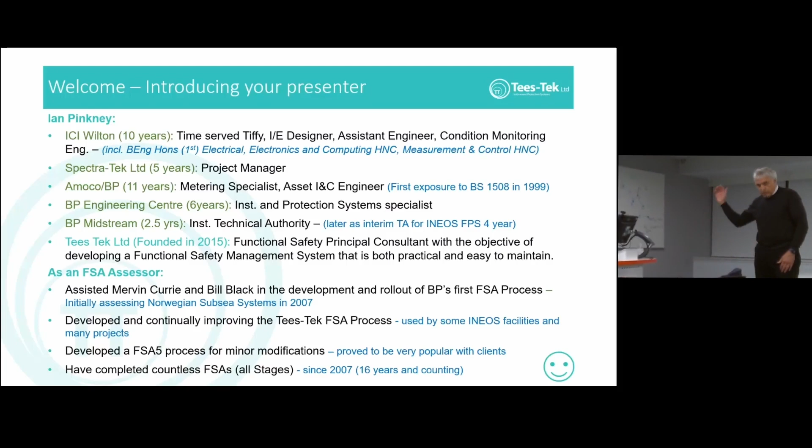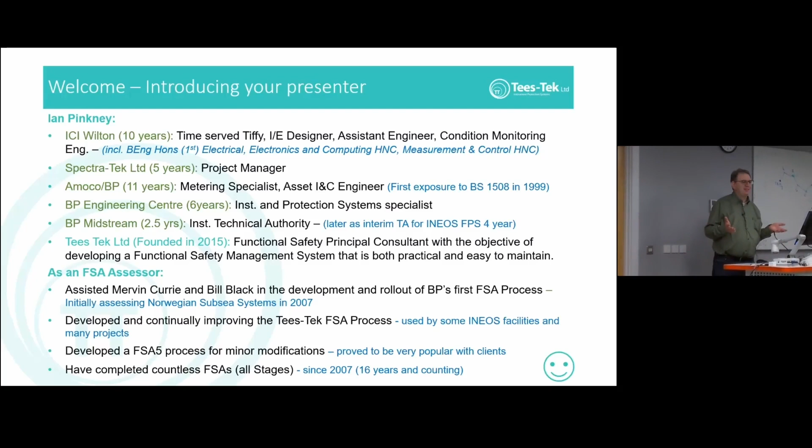So today we're going to talk about reliability. Before I start, well, this is me on the screen at the moment. I just want to say that unfortunately it's one of those subjects that didn't have a lot of good graphs and pictures to put on. When I rehearsed it today, it did take a while, so I'll be going at a bit of a pace, so if you can bear with that, that'd be great. But I'm hoping you'll find the topics interesting, particularly if you're doing functional safety and doing the reliability calculations, that sort of thing.

I'll very briefly say that I started my working career on Teesside, ICI Wilton, like a lot of people, and then since then I went 25 years working everywhere else, and only in the past 10 years did I return to Teesside, where I work from. But most of my clients, because of my past, tend to be outside the area, so you probably won't know me from working in Teesside.

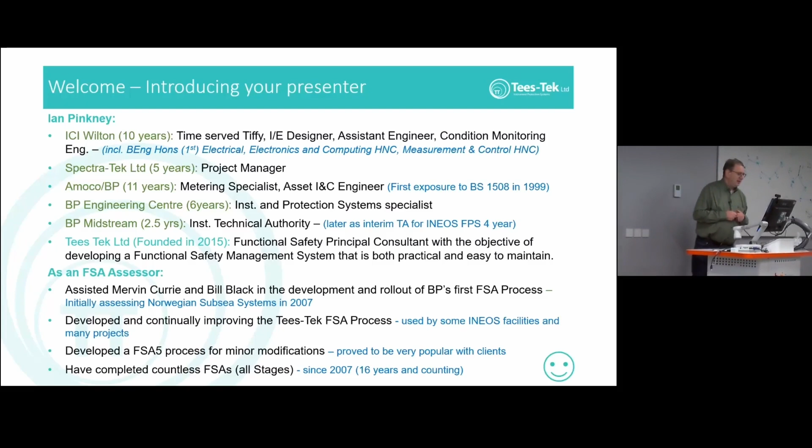So last time we looked at the SRS. This time we're just looking at the SIF reliability study. I'm hoping to do more of these if you're interested, and we'll look at other activities in the safety life cycle, and look in some detail at the typical things that are misunderstood, or mistakes people make, or terminology that's misunderstood, and so on. So this presentation is based on my experience as a technical authority and functional safety assessor.

We're going to be looking at the reliability. We're going to be talking about 61511 - that is always my guide, and there's things in here. Now, there's a lot of words in this presentation, but hopefully that will make a good handout as well. So if you've downloaded it from the InstMC site, all the information's there.

Before I start, I want to remind you that BS EN 61511, or IEC 61511, has been developed by humans, and it's an international team that was involved in the first development of it. That means they came from varied outlooks, individual biases and personalities that you always have, varied competencies were in the team. There were national, company and individual objectives. There were varied opinions, and safety tolerances and compromises were made. And there were different vocabularies and terminology from different parts of the world. So the document itself does have, and if you know where you're reading it, you can see them, these compromises, inconsistencies and discrepancies.

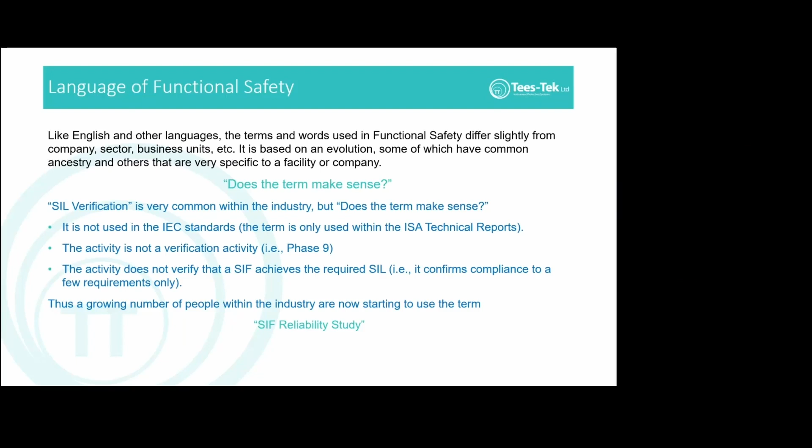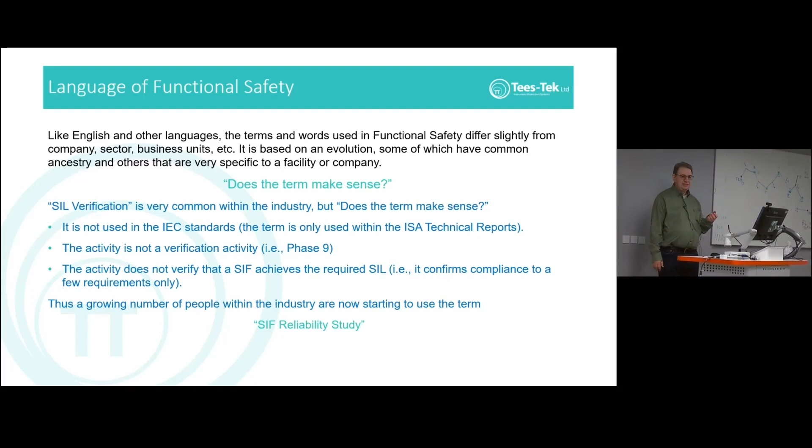But I would always say to you, does the terminology make sense? I'll take one example: this subject is often called SIL verification. It's used throughout the industry, that term - I use it because I know people understand if I say it, but it's not ever referenced as that in any of the IEC or ISA standards. I'll be clear on the standard.

In the definitions, it's an activity that's not a verification activity. It's not a phase 9 activity, it's a phase 4, it's to do with design. And the activity is not to verify the SIF achieves the SIL. In fact, all it does is look at compliance of a small few items, all related to the SRS.

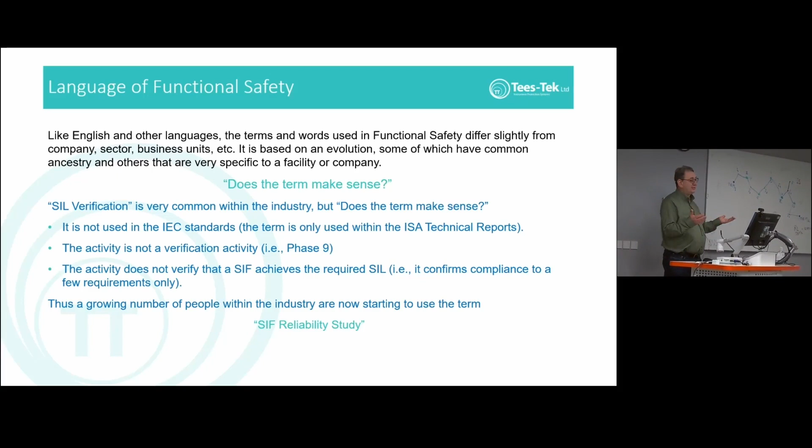So there's a growing number of people within the industry that are now starting to use the term SIF reliability study, and I think that's a far better description. But again, it's not in the standard, so you can use whatever makes sense to you.

Now, the standard clause on failure rate, and we're going to talk about failure rate here, is that the reliability data used when quantifying the effect of random failures shall be credible, traceable, documented, justified, and shall be based on field feedback from similar devices used in a similar operating environment.

Now, I've highlighted what to me are the key words. Credible, traceable, documented, and justified are not just keywords for this activity, they're keywords you should use throughout functional safety. Whenever you're doing work, whenever you're asked a question, whenever somebody puts something in front of you and says, is this okay? Ask yourself: is it credible, is it traceable, is it documented, and is it justified? Because that's what people who do functional safety assessments will be doing if they're doing it right. And certainly the regulator will be doing that.

The field feedback one, well, we'll cover that in a slide or two.

Now, there's many failure rate sources available. I'm sure you've used a number yourselves. There's what we call field data, like OREDA and SINTEF, which is drawn from, particularly OREDA, which is offshore. It's taken from their databases, and they do analysis on it, and they come up with some values.

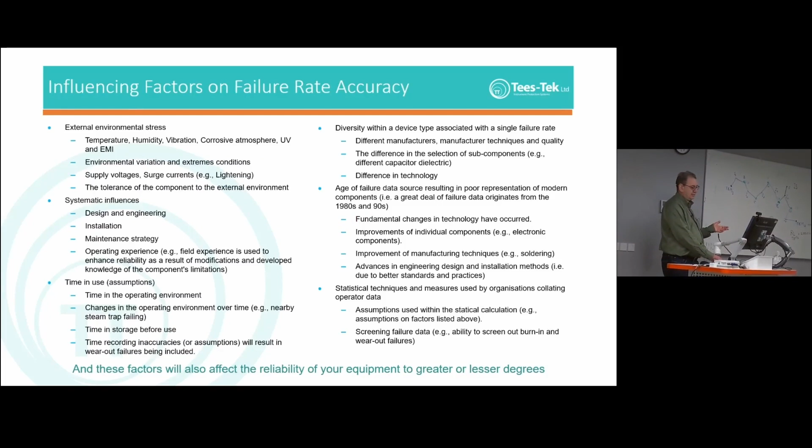So how, what would the regulator be looking for? Which one? These are just influencing factors - there's lots of influencing factors on this data. You can read that yourself.

So the regulator ideally is looking for field feedback, data taken from the facility in question, accurately diagnosed and recorded, good practices for identifying systematic failures amongst the historical data, causes of uncertainties identified, assessed and accounted for, and an upper bound of confidence of 70% for each reliability parameter.

Number of sites I've seen doing this: 0%. Nobody's doing it. It is very, very difficult. I've seen many attempts, different ways of doing it, and they've all failed. I have built up my own ideas of how this could possibly work, but it's taken me a lot of years to see all these failures, and now I think I know the solution. But how would I know? Because it would take years and years of collecting data to find out if we're on the right track. So the chances are that you're not going to have that data.

So here's another way of doing it. Always start with certified data - that gives you the traceability, particularly if it's from an independent, trusted organisation. Then compare that certified data with other sources of information. Compare it with your field data that we talked about, OREDA, with your likes of SINTEF, generic data, and FMEDA, and so on. Ideally, another certified device.

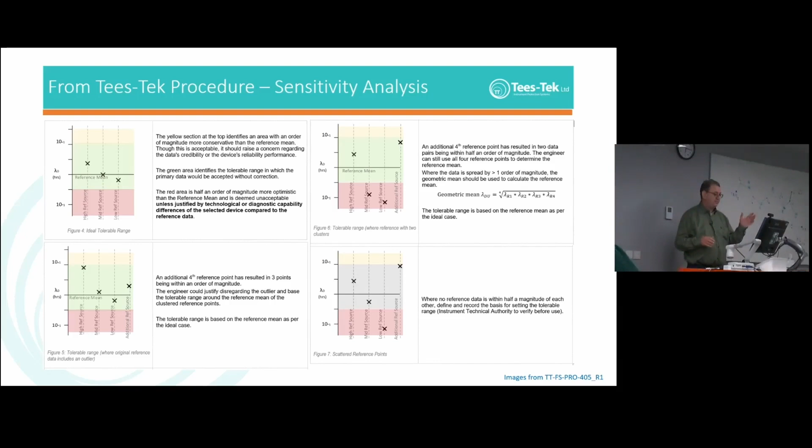This is straight out from my procedures, and it just goes to show how you can compare data graphically. The first one shows everything is within half a magnitude of order, and that's in the green area, no problem.

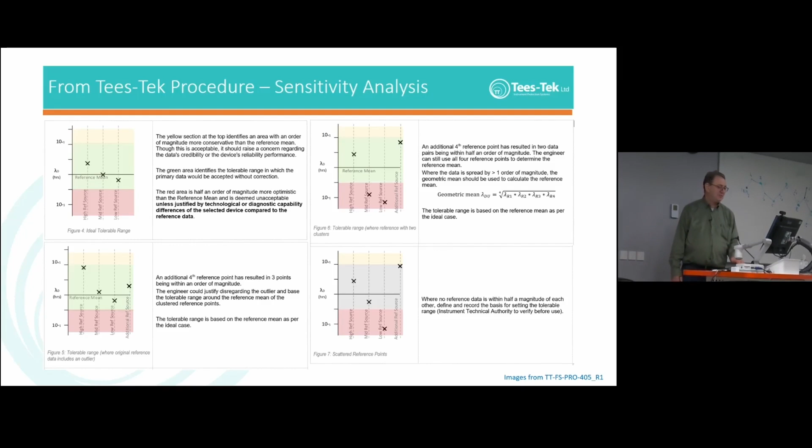The next one says, well, let's imagine that the first three come out and you've got one outlier. Get another bit of data and compare it. If they're all sort of outliers, then take the geometric mean and maybe use that as your reference point, or move that as a comparison for your certified data. If you can't do any of that, then maybe have a chat with somebody else and see how to deal with the situation - a technical authority, if you have one in your company.

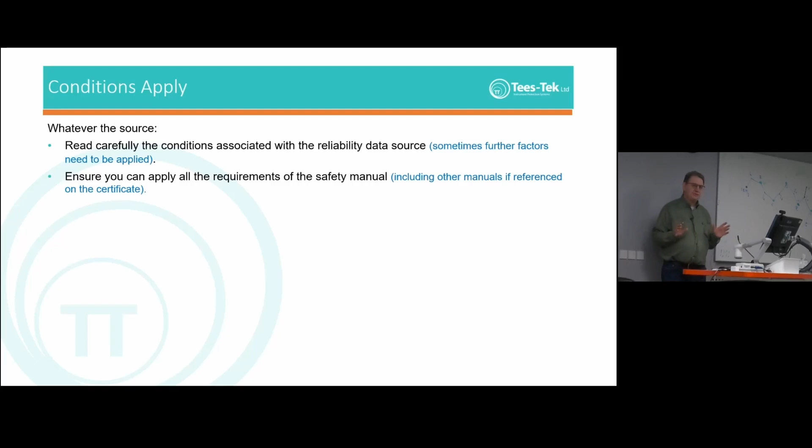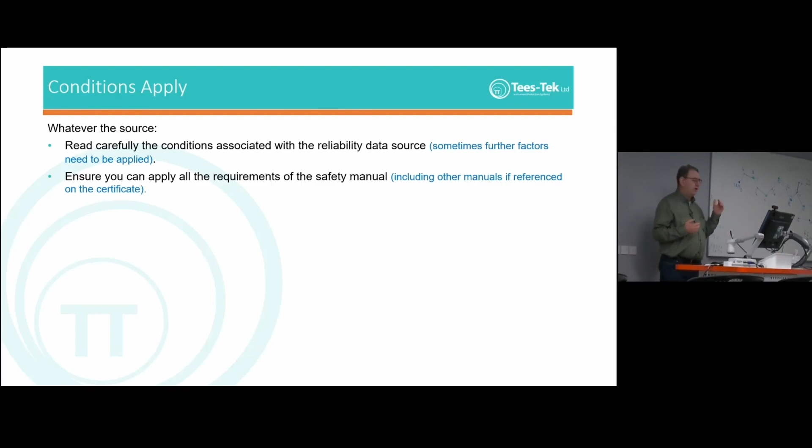So, firstly, I've got a question for you guys. Question 1: what is the difference between random and systematic failure? Is it A, systematic failures are deterministic and not random, and random failures aren't - i.e., it fails given a set of conditions? B, systematic failures can be eliminated by modification, but random failures cannot be eliminated? C, random failure rates are more or less constant after burn-in and before wear-out, while systematic failures are not constant? Or is it D, all of the above? So, anybody want to decide which one it is? D. Does everyone agree with D? Yeah, D is correct.

So, next question. BS EN 61511, section title 11.9. It's basically saying, what is the requirement for this activity that we're looking at? Is it the quantification of random and systematic failure? Is it the quantification of random failure, quantification of systematic failure, or does it just say quantification of failure? Anybody? Okay, so it's quantification of random failure.

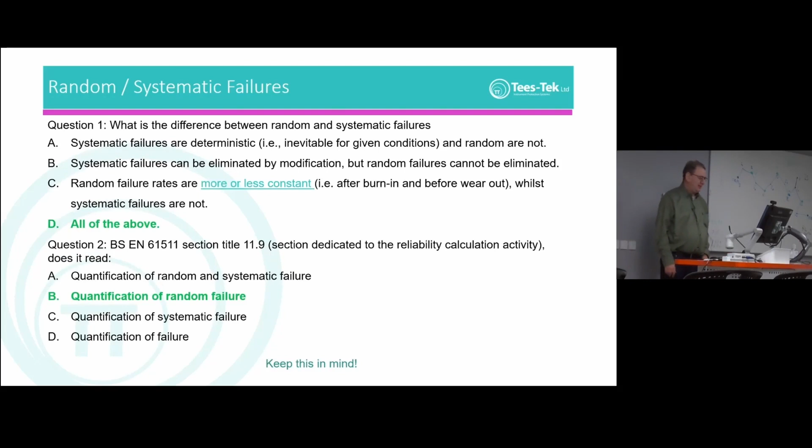This is important, and the reason it's quantification of random failure is because you can't quantify systematics - that is the basis. You cannot quantify systematics because they don't meet any of the criteria. They're not a constant failure rate, and on some sites certain types of failures will be fixed and they don't happen again because you can fix them. On other sites they will be there and they don't get fixed. So from site to site, it's not even random.

It's systematic. What would be an example of a systematic failure? Poor installation, or what? So, a systematic failure is, as you say, poor installation. It could be blocking of an impulse line with liquid. Let's say that every time you do a letdown or something like that, you block your impulse lines. That's systematic, yeah?

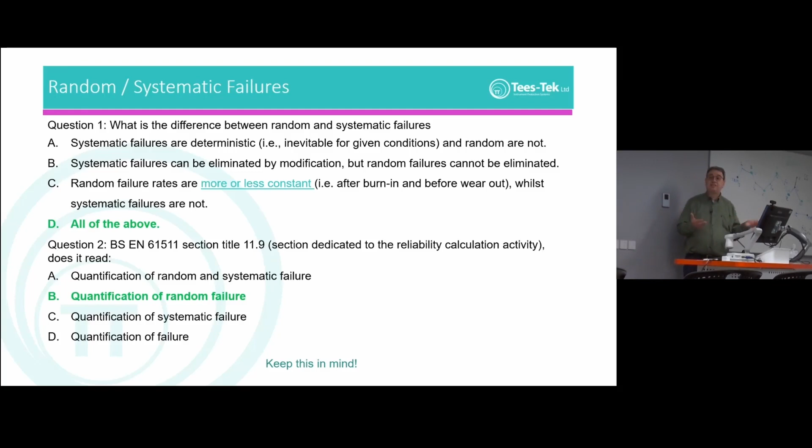Now I want to talk to you about de-rating factors, and this is linked. These days, when you get these calculation models from the likes of ExSILentia and ABB, they come with these, and they're getting more and more de-rating factors.

You get things like wet and dry factors, where you multiply the random failure rate due to the process condition or the environment. You get Site Safety Index, in ExSILentia SSI, multiplication factors of random failure due to process conditions, and management and so on, specific to that site.

Maintenance Capability Index is another value that people who use ExSILentia tend to use. Again, more multiplication factors for random failure, depending on the ability of the site maintenance team. So basically, if they're incompetent, instead of fixing the problem and getting them trained up, it's not a problem because you can just put a low MCI factor in, and multiply it against your random failure rate in your calculation. That'll solve it.

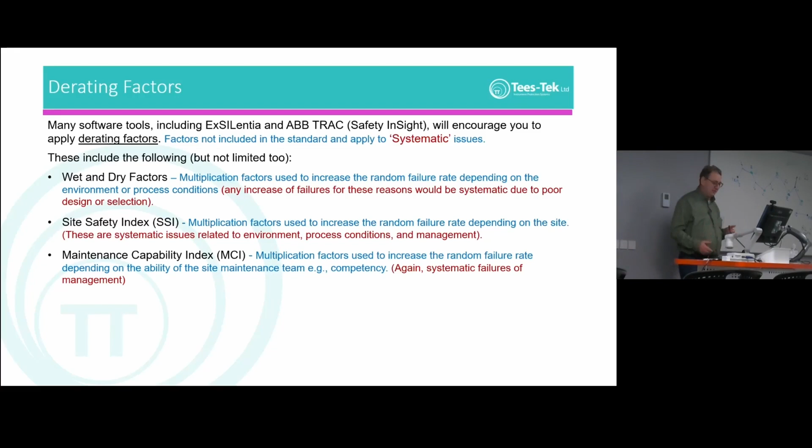But does it? Before using any of these factors - these are all systematic failures. There's a tendency to try to shove systematic failures into your calculations all the time. How can a systematic issue have any relative relationship to a random failure? It doesn't. How does increasing the random failure rate improve the accuracy of your calculation? You're out there to quantify the random failure rates, that's what the standard is saying. You've been given a value, you've gone and found it's credible, and then you're making adjustments to it.

Does it improve the safety by compensating for poor functional safety management? Well, not really. You're just trying to compensate for it, but in a stupid way, really.

Take for example, let's say you've got poor maintenance - well what will that do? You mark it down, it's going to increase the random failure rate, which is going to increase how often you're going to test it, which means that safety instrument is going to be exposed to those useless technicians more often. It is not the way to go. You need to solve it by solving your systematic issues, solving your maintenance issues, solving your management issues, and so on. You do not just put multiplication factors into the calculation.

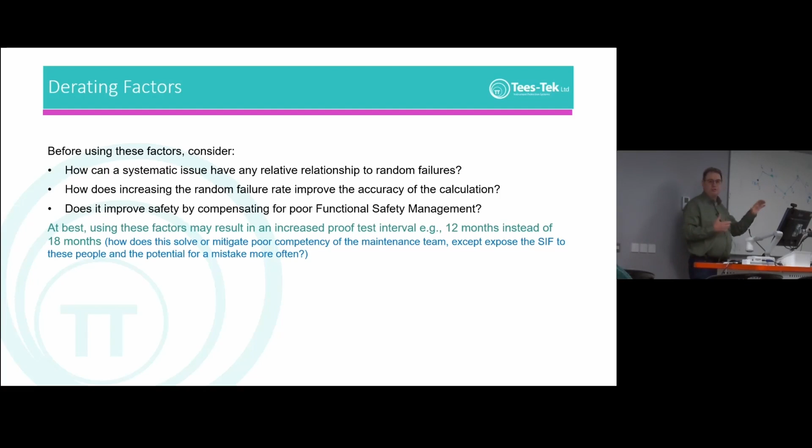A lot of that comes down to what we were talking about originally, which was you're not that confident on the failure rate you're using. So if you've done your sensitivity analysis and proven and got credibility to show to anyone that you know what your failure rate is, then you don't need to start adding in loads of other factors. Give yourself confidence in the failure rate you're using, and if you've got site data, don't increase it, solve it. Don't start multiplying them, solve the problem. Because if it's wearing out, if it's degrading because you've got a thing, replace it.

But if you only get the opportunity every 3 years, every 5 years to make these changes, is it not right to acknowledge that you're putting your instrument into a much more difficult environment, particularly if it's happening all over your site? I just don't see how it solves it. What are you actually achieving though? You're saying, am I reducing the risk to people on my site? Are you? Yeah, I do think you've got to stick with the 2 factors.

So I'll ask a different question. Do you build systematic failures into your proof testing? As in correction and finding and straightening up of systematic failures? Oh yeah, absolutely, you would.

We need to put them in because we're trying to make sure people don't miss things. That is because we include inspection, because inspection is a maintenance routine that you should be carrying out, which tends to look for systematic failures. And we tend to include that at the same time as we do proof testing, so we join them together in the same procedure.

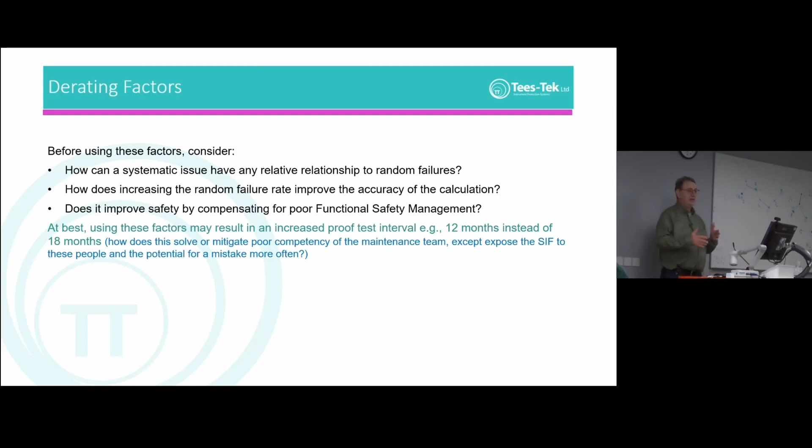Oh yeah, I agree, and that's what functional safety is all about. Functional safety is all about managing the systematic element of it. And that's really what I'm saying, that's what you've got to do. You've got to do good functional safety management rather than trying to just compensate.

Okay, we're going to move on to a different subject: dangerous detected failures. Now this is something I always have said to people, be very careful with this. With dangerous detected, a lot of the time it's fine, but be very careful.

So firstly, you understand that when you've got your failure rate, whatever it is, it's a quantity this big, and then you're dividing it up into your undetected dangerous failures and your detected dangerous failures. Now the bit that you've said is dangerous detected failures, when you look at the calculation, it's going to have no influence on the calculation at all. Because basically all you're doing with failure rates in the calculation is timesing them by a period of time. The bigger the period of time, the more influence it has. With dangerous detected, all you're timesing it by is typically 72 hours, 96 hours, compared to the others where it's timesing by months or years. So it has a very, very minor impact.

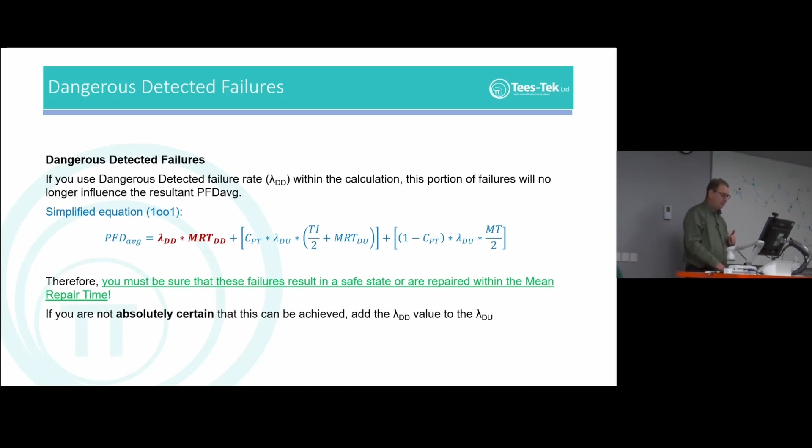Now, if your dangerous failure results in an automated safe state of that SIF, no regulator is going to raise an issue with that, and it's fine to use the dangerous detected failure within your calculation. However, we often find dangerous detected failure used in places which raise alarms. Now there's nothing wrong with that in 61511 and 61508, it permits this.

But the regulator or an FSA assessor is going to look into it a bit deeper, because the requirements associated with alarms and what they're going to look for is going to be more challenging. So they're going to be critical, when you've got critical faults that are related to a dangerous failure of a SIF.

Activates an alarm only. Firstly, we're going to say, is it from the alarm going off to the repair being made? Is it done within the mean repair time? Okay, no problem on that one. But that means somebody's going to monitor that.

And how do you prove it? Okay, if the regulator said, prove that you did it within the repair time, I've got that information - it's one of the things where you just don't have the information. We do. Honestly, the operator response is defined and understood.

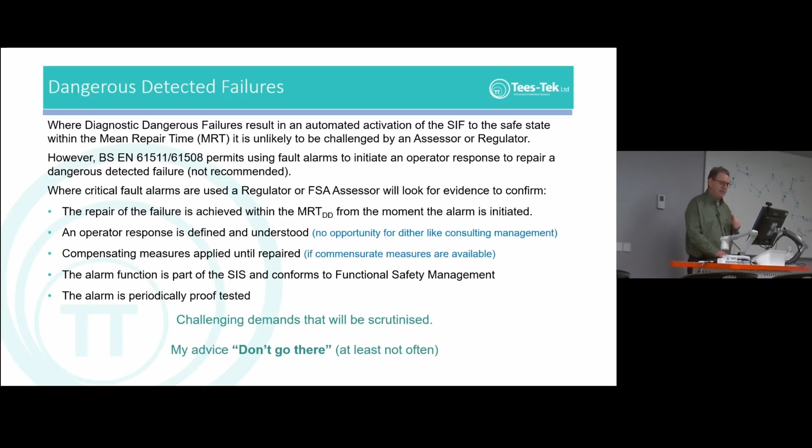Okay, another subject, so I'm going to keep on moving. Use a diagnostic flag like that and just say, I'm just going to trip. If it's tripping, it's fine. If the operator is told to trip, that's fine.

And it brings up a good point. I was given an example the other day, where they were using a partial stroke test - an automated partial stroke test - and I said, okay, so what happens when the alarm goes off? Because they can't really shut down, because if the valve's not working, they can't do its job. So let's say your partial stroke test raises an alarm and says, I can't...

...work - the dangerous detected fault. And in this particular case, I said, well, what happens? Oh, well, we have to report it to management. Why do you have to report it to management? Oh, because that shuts the whole plant down.

Yeah. Now, what if the management is under stress at that moment in time? He's under pressure from his management, or from the government saying we need gas - there's a shortage, the country's under stress. What do you do? So the recommendation for that particular customer was that they should have it written down.

They should get management in, and they should decide now, while they've got clear heads, what the action is, and have that written down, as you just said, and that's what the operator does. In that case, the alarm would be perfectly fine.

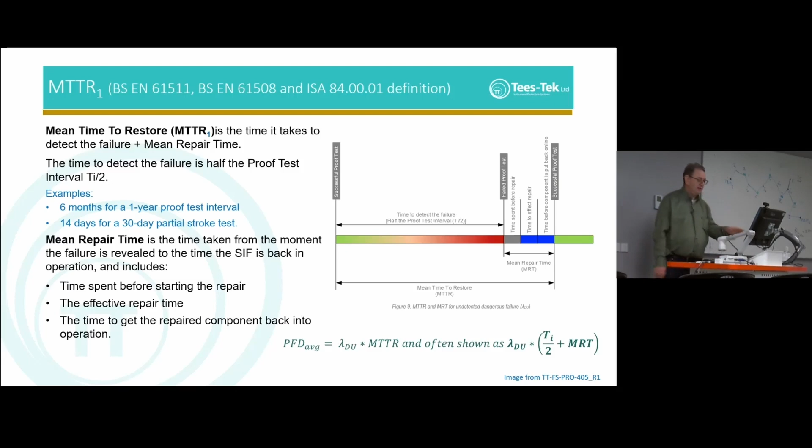Now let's compare it with mean time to repair value. The mean time to repair value is a little bit different, because when you read the definition, it's the average time between the occurrence of the failure and the completion of the repair, and it must include the same three things that are in the mean repair time. In other words, the MTTR in the mean time to repair is the MRT value. So you see they're actually two completely different things.

So why do they use that value? If they mean two different things, what do they actually mean? Well, it all comes from the same source as the SIL verification word comes from. It's the ISA technical reports. These aren't standards, they're just guidance, and these reports keep raising these words and changing meanings. When they're doing it, they're doing it under an example where the diagnostic sample time is so small that basically you can discount your time to detect.

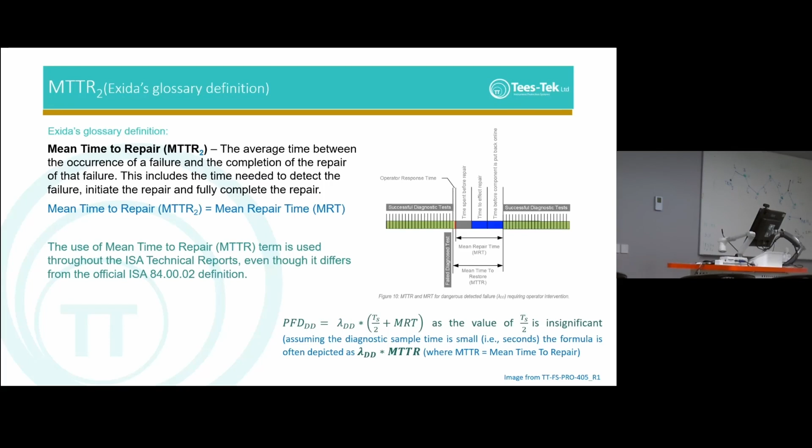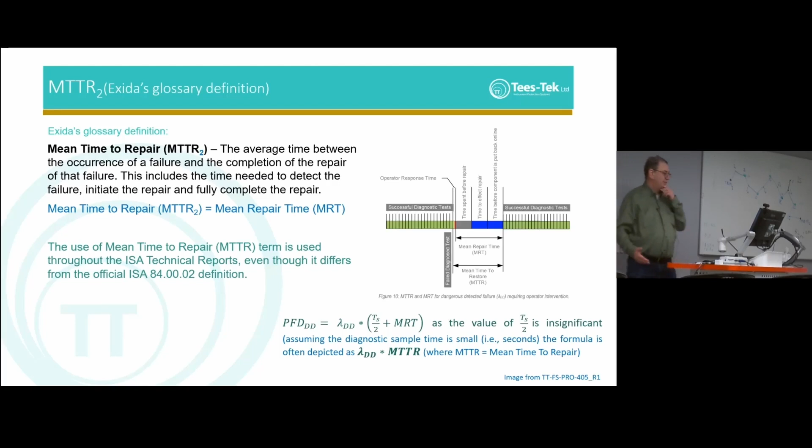So you discount that, fine. Most of the time it's okay, because most of the time when you're using Lambda D, it's done in electronics, it's all fast, and so when you times it by mean time to repair, which is the 72 hours, it comes out right. But as soon as you start using it on things like partial proof testing, which is what most of the software applications that do self-calculations do, you now got your MTTR is no longer 72 hours. It's that 30 days, it's that 14 days, it's half the test. It's no longer insignificant, and the MTTR value is now incorrect, and that can cause a lot of confusion.

Plus, I hate the fact that they use — and I don't know if it's changed in the new version of exSILentia, I think it has, but on all the older versions — they've taken a proof test into the proof test coverage of a partial stroke and shoved it into Lambda DD. Remember how I showed you the first calculation, how it has no influence then. But what you really have is a Lambda DU, what it should be is times by your partial proof test coverage. That's what it should be, but they fudge it because they haven't got the calc to do that, so they fudge it. So be very, very aware of that. The regulator will find that one if it looks at a SIF with that on.

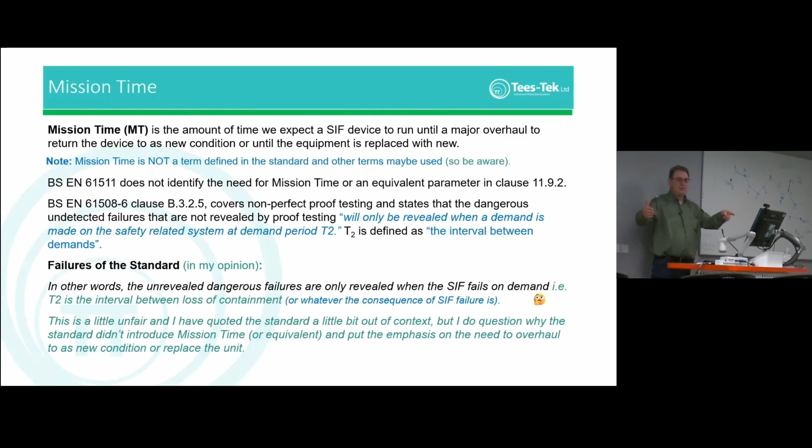61508, the sixth book - I call it -6 - does all the calculations, shows you all the calculations. Towards the appendix, that does cover non-perfect proof test. But basically, when you read the words, what it says is your mission time is the point where it fails and you have a hazard - that is your mission time. That's what they call T2 - the undetected failure part, the undetected failures that you haven't been testing, will only be revealed when a demand is made on the safety system at the demand period T2, and that demand period T2 is the interval between demands. In other words, a demand. Now, if it's an undetected failure, that means the SIF is not going to work on that demand, and therefore it's going to be whatever comes next - loss of containment or whatever.

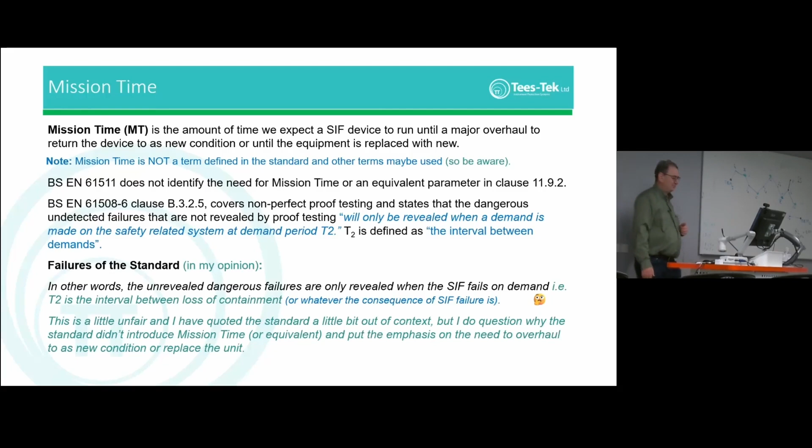I don't think that's good enough, personally. So, I think it was Exida - I've criticised them a little bit in the last few things, but I think they were the ones who often used the term mission time, and I think it's good that they did that.

However, on the other hand, where I have seen mission time being included in software, it is often misused - there are failures in the software, they misdefine it in common. I read one just the other day - it was an older version of Exida, and the description of mission time was that it's the expected life of the facility. Well, it isn't - it's the expected life of the device. And you couldn't say, okay, I know what it really means, because you only had one mission time, and it was for the whole SIF. So you couldn't do it on a device-by-device basis, which is wrong. You need to be able to do it on a device-by-device basis, because your transmitter will have a different mission time to your valve.

So the software applications aren't ideal. Again, I do believe that they are improving this.

There's also failures of the users as well, too much reliance on 100% coverage. Now, I will agree with you on times.

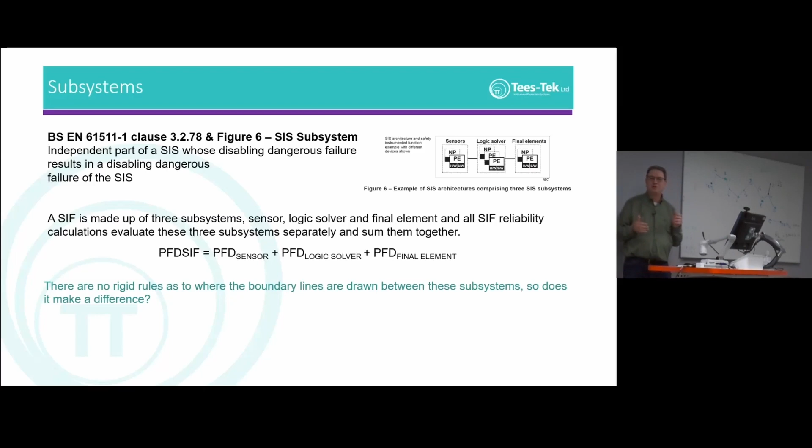So what it was, it's basically, you know, all these software packages, they always group it into the sensor element, the logic solver, the final element, and then you've got all the components, you've got to put them into one of the other category. And he was like, well, which is the best way of doing it? Where's the boundaries lie? Because they don't specify that. So typically, of all the people, all the companies I've seen, all the sites I've been to, the first one is your most typical.

Okay, your input subsystem is sensor, transmitter, barrier if it's IS, and your output is your solenoid valve actuator and ball valve, and then the middle, the logic solver, is everything in between.

Now, I looked at the client I was talking to. We were saying, well, they were asking, could it be done this way? And the answer is obviously yes. You could include the input card into the sensor, and you could include the output card into the actuator, into the final element. Now, which one gives you the most accurate result?

It can make a big difference if you don't always test the trip wet end to wet end every time, all the way through. And so you test the front end more often than the back end, then you have to think very hard about when does the middle get tested. Yeah, you've hit the nail on the head there.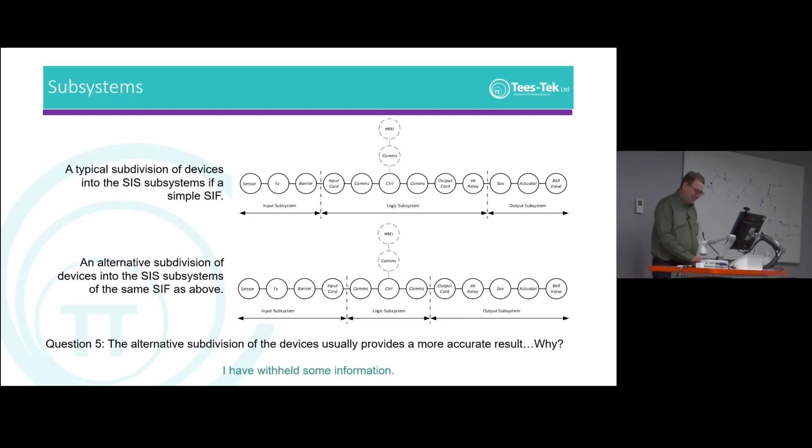Yeah, it is. It makes a difference if you're testing the sensor element more often than the final element, all the subsections. If your testing intervals are significantly different, it can make a big difference. Not a massive difference, but it can make a difference.

And therefore, you've obviously got to know the way you proof test. If you tend to proof test from your sensor all the way to your logic solver, and from your logic solver all the way to your ball valve as two separate proof tests, and you do them significantly more often than you test your logic solver, which I would question if you're doing that, is there any point in doing your logic solver?

But if you're doing that, you will get a better PFD, and you include that into your breakdown of your subsections, you think you will get a slightly better PFD. If you're working on a job and you just cannot achieve that target, it's one way to get a little bit more, that might get you over that limit. I thought it's a nice little one to include.

I wouldn't be bothered with whichever I saw on a site if I was just doing an assessment. It works better like that with the voting arrangements we find. It does. It's more realistic, isn't it? Really.

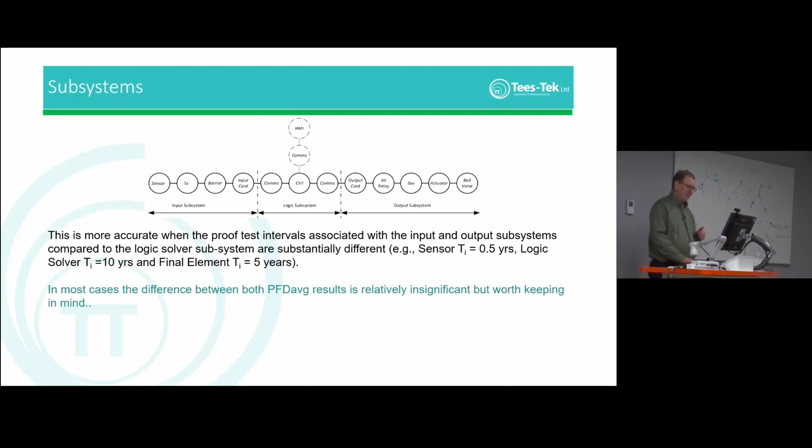Now, as for testing the logic solver, that's a massive subject that would take another hour, so I won't cover that. You go back to your first thing, then once you've thrown in the logic solver, you go back to what about your systematic?

Now, summary and conclusion. Firstly, I'd say we've hit quite a lot of topics tonight, and I've gone quite quickly. We haven't really had time to debate them much, and there's even plenty more we could discuss, including the beta factor, or what I like to call the beta fudge factor.

The architectural constraints—does the standard really oversimplify that? Either of them, they've slightly different approaches, 61511 and 61508. But there's a lot that goes into your architectural constraint really, and I think they've avoided that. And systematic capability, it's...

these number of times I see reliability studies without taking into account systematic capability. This week, again, another one landed on my desk, and one of the problems is it's so easy on some programs—I think in all of the programs really—they can just switch it off.

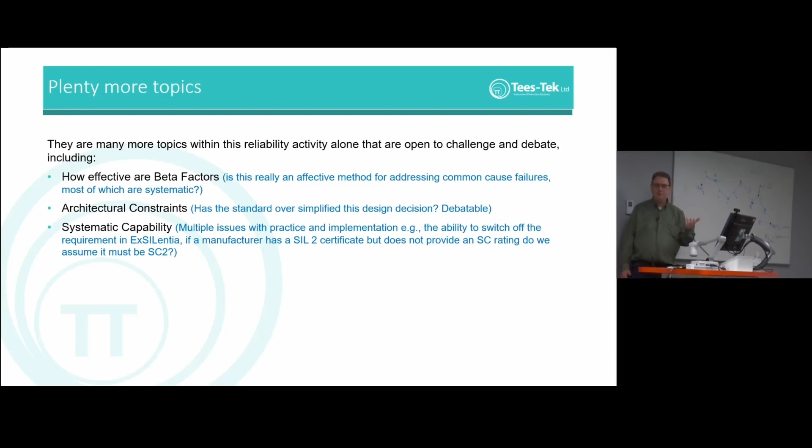Some people have said, 'Oh well, we've used certified data, and it's SIL 2, we've got SIL 2 certificates.' I said, okay, well you've got a SIL 2 certificate, you've got a safety manual—does it give you this? It should, if it's been done since 2010, should give you the systematic capability. And there's still a lot of them that don't.

Do we take it as read? Oh well, if it's achieved SIL 2, it must have it, it must be appropriate. I would suggest it isn't actually. I would suggest that if any manufacturer had gone through the 61508 process of doing a systematic capability assessment with an independent body, then they would have made sure that was in the safety manual, because they could have paid good money for that.

So now, at this moment in time, a big chunk of the standard goes on about proven in use, and what's the other term—prior use. Now these terms are all about systematic capability, that's what they're there for. They're not about determining the failure rate or anything else.

If you don't think it is, read the standard again. It's about determining—if you haven't got systematic capability, then you're supposed to use a prior use case. So it is a big issue, it's a big part of 61511.